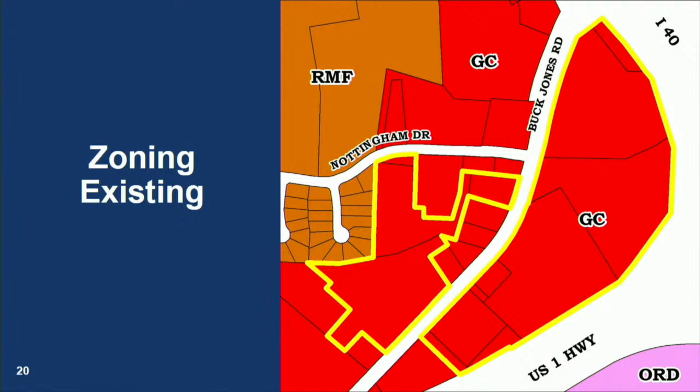As noted, the current zoning is general commercial, again with no conditions currently included on the site. The applicant is seeking the mixed-use district, or MXD, which allows the applicant to set their own dimensional standards and propose alternative standards to the land development ordinance.

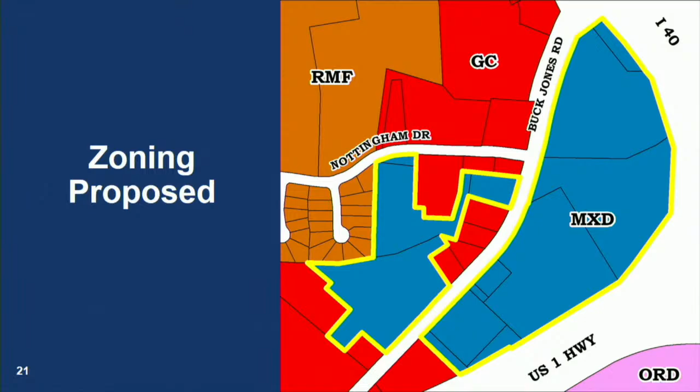Talking more about the MXD district, MXD also requires a preliminary development plan to be submitted. In this case, the South Hills development, due to the size and the assemblage, the applicant team is proposing a framework for redevelopment to occur.

At the heart of the framework is turning the existing surface parking shopping center into a network of streets forming a grid network, which could create up to 27 development blocks. Within the development, there will be 75% use of structured parking and 60,000 square feet of community gathering area distributed through the site.

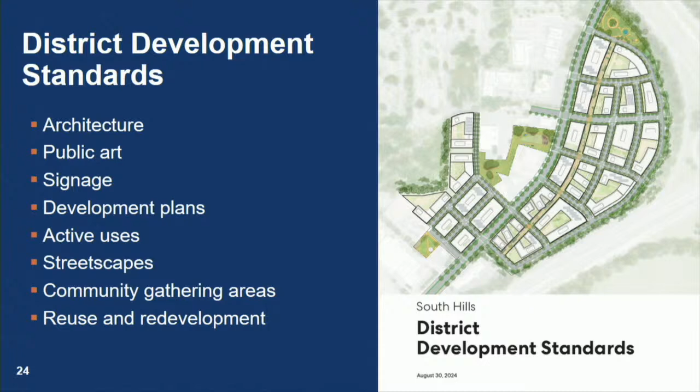To govern the framework, the development team has proposed a set of district development standards which propose site-specific standards for architecture, public art, signage, development plans, active uses and streetscapes, community gathering areas, and reuse and redevelopment.

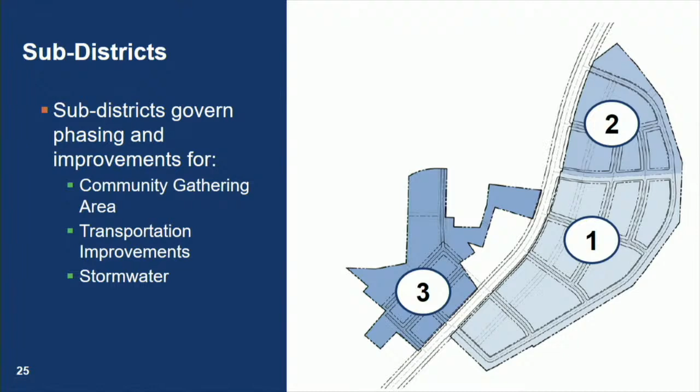The site has been divided into 3 sub-districts for the purposes of phasing and infrastructure improvements. The first 2 sub-districts are located on the east side of Buck Jones Road, with the third being located on the west side.

Unlike other developments that we typically see, the site is not governing the location of uses by pod or zone. Instead, it'll govern uses by a land use ratio and regulation of active ground floor uses. First, the land use ratio is proposed to require 25,000 square feet of non-residential area be maintained for every 100 multifamily units, and this ratio must be balanced throughout the site duration to control the mixing of uses on the site.

Secondly, the site would regulate active ground floor uses. They've divided the ground floor uses into 3 types: primary, secondary, and tertiary. Primary uses include uses that would be most active, so like retail, restaurant, uses that have a lot of public activity. The primary ground floor active uses would be located along this salmon-colored area that runs north and south through the site on the east side of Buck Jones Road.

Secondary uses would include lobbies, ground floor offices, things like that. Those uses would be allowed along other ground floor frontages. Lastly, there will be some allowance for tertiary active uses, which would allow for service areas, loadings, more back-of-house type operations typically.

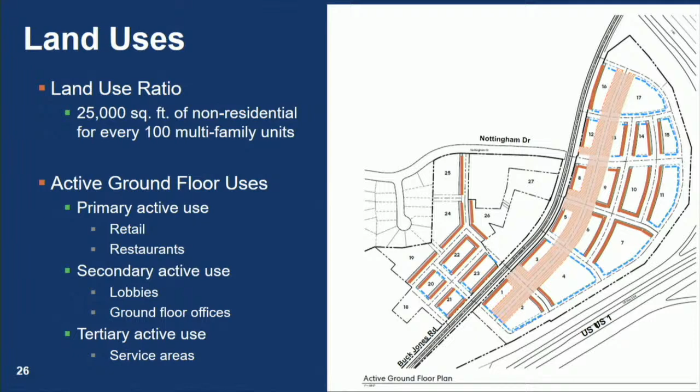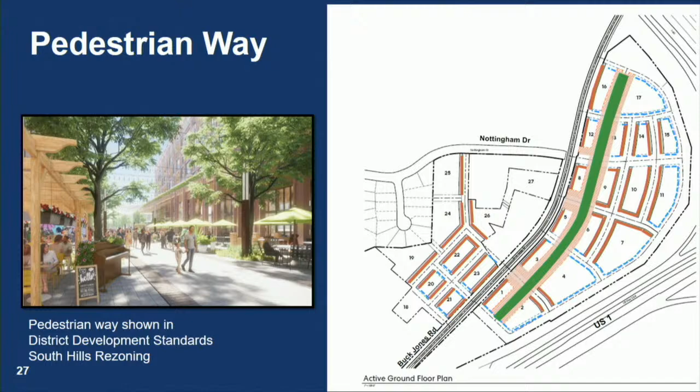Running north and south through the site and aligning with the active ground floor uses is a pedestrian way. This will be an area accommodated for pedestrians and bicyclists, and the most active uses will be fronting this pedestrian way, again running north and south through the site.

Building heights have been established within 3 height zones. Height Zone 1, the western part of the site adjacent to residential uses, will allow for buildings between 2 to 6 floors. Height Zone 2, which frames Buck Jones Road, will allow for an increase in height between 3 to 15 floors. Height Zone 3, closest to the highway along the eastern portion of the site, will allow for the tallest heights, ranging between 3 to 23 floors.

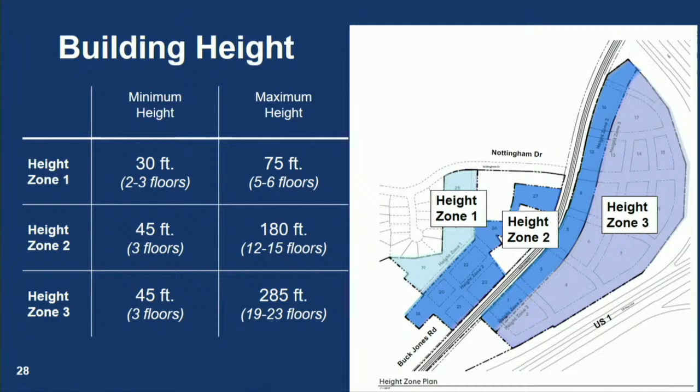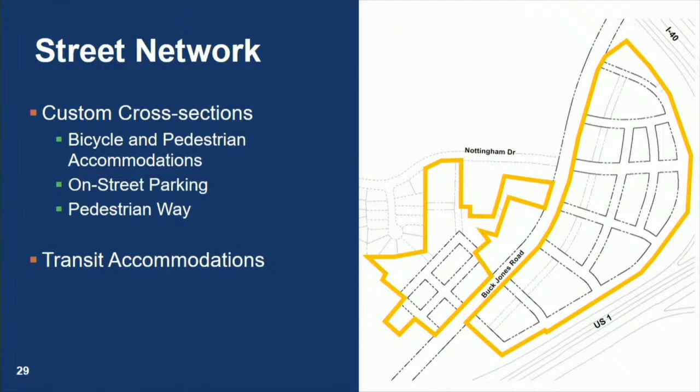The site is proposing custom cross-sections that will include accommodations for pedestrians and bicyclists. There will also be provisions for on-street parking. Again, the pedestrian way, which runs north and south through the site, will provide plenty of accommodations for pedestrians and bicyclists as well.

The applicant has also committed that a transit hub will be included within the site. The location of the hub has not yet been determined, but key characteristics could include additional amenities such as bicycle and scooter rental or storage, wayfinding signage, scheduling boards, and shaded or conditioned waiting areas. The amenities listed here are in the standards book and not necessarily committed to as conditions.

Due to the mixed-use nature of the site and access to transit, bicycle, and pedestrian accommodations, the applicants are proposing a reduced parking ratio for multifamily dwellings. The parking ratio would require 1 space per bedroom for 1 bedrooms or studios, and for each additional bedroom, an additional half space. This is slightly less than our LDO requirement for multifamily, but it is in alignment with some of the reduced multifamily parking found within Cary's town center.

There will also be no visitor parking required. The parking commitments also include a 75% parking commitment to use of structured parking decks, which is above and beyond Cary's requirements, as Cary does not require structured parking. They've also committed to EV charging at a ratio of 1 space per 200 spaces, and they're committing to running conduit at a rate of 10 per 200 spaces.

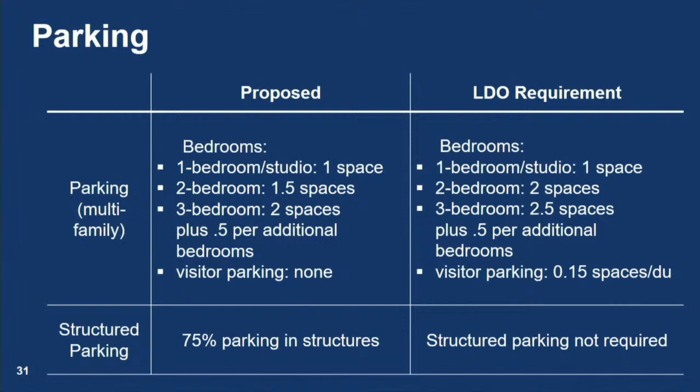To continue building on efficiencies of the mixed-use development, the applicants are also proposing specific allowances for shared parking. They're proposing that up to 70% of parking for a use could be accommodated through shared parking, an increase from Cary's requirement of 35%. Parking could not be shared across Buck Jones Road, and this will replace distance requirements from the LDO. For any shared parking, appropriate justifications would be required to be submitted during development plan review, including looking at the use and time of use for these particular uses to ensure sharing of parking does not occur across uses that need parking at the same times of day.

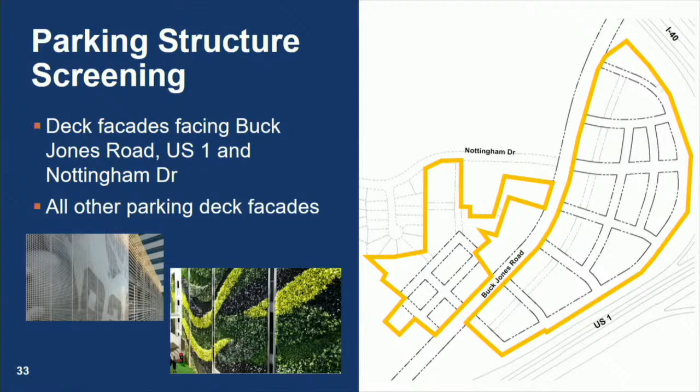South Hills is proposing to develop and implement transportation demand management. This is a type of project or program that will be the first in Cary to actively engage in this area. The goal of transportation demand management is to use a combination of services and built infrastructure designed to reduce the demand for single occupancy vehicular travel and to promote alternative modes of transportation such as walking, cycling, carpooling, telecommuting, and public transit.

Due to the nature of transportation demand management relying on services and programs, we anticipate that much of the program will be enforced through a forthcoming development agreement, but have requested that it be referenced as part of the rezoning since assumptions of the traffic study were made based on the use of a transportation demand management program in operation for the site.

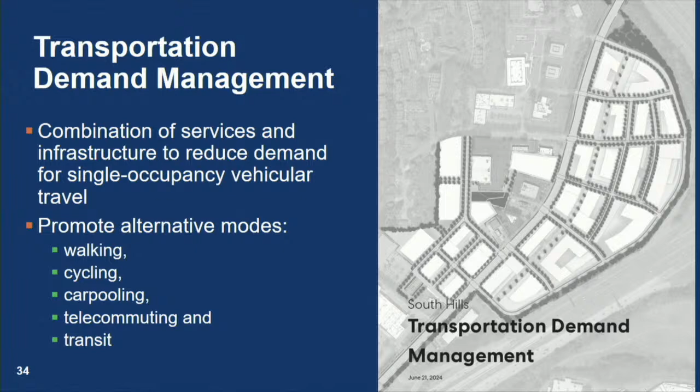As part of the development, a supplemental traffic analysis will be performed for each of the 3 subdistricts to assess the need for improvements associated with that subdistrict. The applicant team has developed a transportation improvements table as a sheet of the preliminary development plan, which preliminarily identifies some of the transportation improvements, and the analysis for each subdistrict will be performed prior to approval of any development plan that would occur within that particular subdistrict. This will allow us, staff, and the applicant to work together over time to ensure that adequate transportation infrastructure is accommodated.

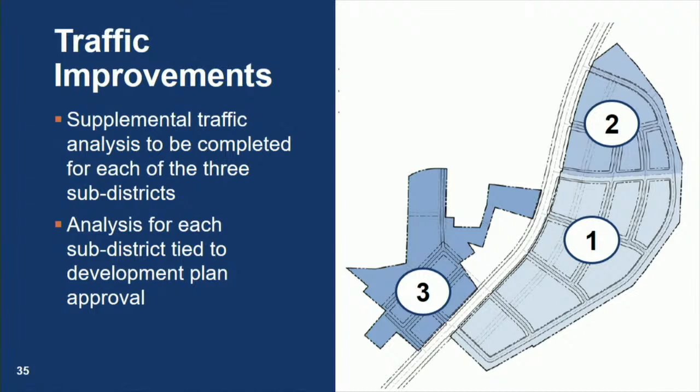Community gathering area will also be governed by subdistrict. The applicant has committed to an overall minimum requirement for community gathering area of 60,000 square feet, which is about 1.5 acres. This exceeds Cary's minimum requirement of 5,000 square feet. They're proposing that gathering area be established and regulated by subdistrict, and that 20,000 square feet of gathering area will be provided for each subdistrict. Within each subdistrict, there will be a major community gathering area that's at least 10,000 square feet.

The subdistricts will also regulate the timing and phasing for community gathering areas. Within that, the applicants are proposing for any gathering area that's 10,000 square feet or larger, that a portion of that will be permeable area.

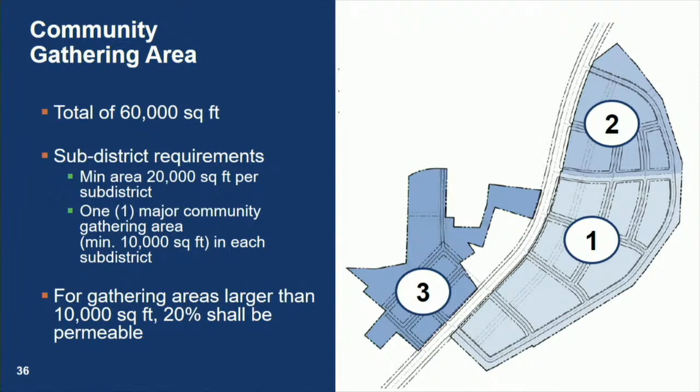While the site was developed before Cary's current stormwater requirements were in place and would likely not be required to add traditional stormwater devices typically seen in greenfield development, the applicant has proposed to include custom requirements, which would include a post-construction stormwater management plan with peak flow reduction at a specific point on Walnut Creek that was determined not to negatively impact flooding conditions downstream, and a commitment that each subdistrict of the plan achieve a targeted nitrogen reduction through the use of green stormwater infrastructure.

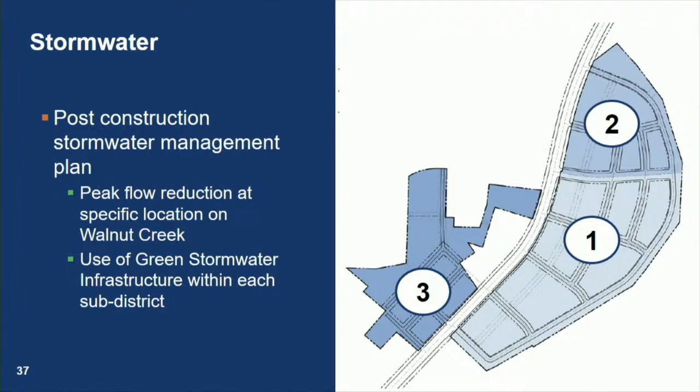As part of the district development standards, the applicants are proposing that the standards within this document will replace the requirements of Cary's Community Appearance Manual. The Community Appearance Manual regulates building materials, architecture, and design for buildings, so these standards will replace that document, and they are proposing alternative standards to address design and architecture.

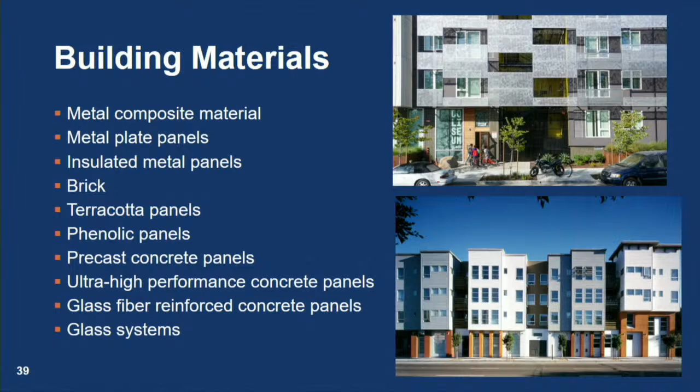Notably, the district development standards propose a material list that substantially varies from the standard masonry requirements of the Community Appearance Manual. Examples of alternative materials are listed here. This variation will allow buildings to have different appearances, perhaps unique to the South Hills district, and not necessarily consistent with other major projects in Cary.

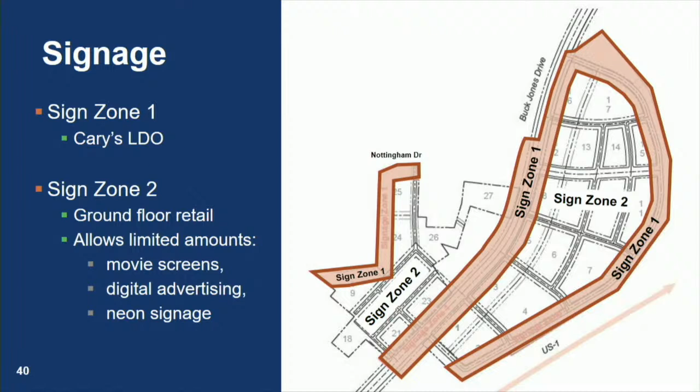The applicants are seeking most of their modifications within Sign Zone 2, which represents the interior portion of the site, not necessarily visible from exterior roads. Within that, they're proposing some variation for ground floor retail signs, as well as limited amounts of movie screens, digital advertising, and neon signage. Specifically, their standards propose 4 tiers of signs that will include requirements for entry monuments, ground level activated uses, wall signage, and vehicular-oriented and pedestrian-oriented directional signs.

Pedestrian entry monuments, which could also be obelisks, could include the project name, and would be located at entry points along greenways, pedestrian ways, and gathering areas.

Most flexibility will be permitted for ground level tenants within Sign Zone 2, the area interior to the site and not necessarily as visible from exterior roads. They're proposing allowances for painted signs, such as the example we see here, illuminated cabinet signs, and also allowances for digital parking deck signage.

The reuse and redevelopment provision allows for the reuse of existing buildings within subdistricts 2 and 3 to remain as long as certain criteria are met, such as no increase in the overall square footage. It also permits temporary pop-up structures, and there are no limitations on the duration of the reuse.

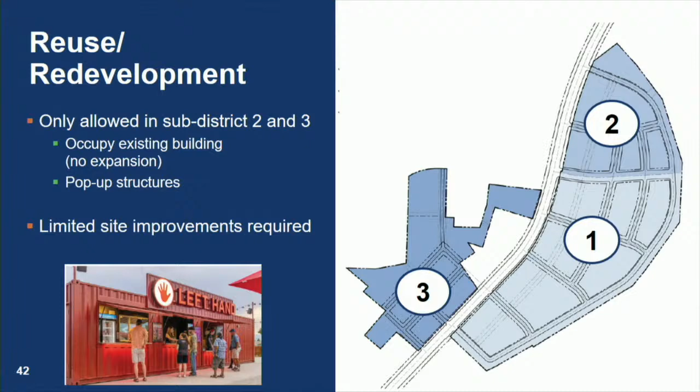The applicant has proposed customized streetscapes. This will include streetscape width variation, and plantings will include native trees, and other features such as seating, trash receptacles, and bike racks. This differs from Cary's streetscape requirements, which are generally mostly planting areas, but perhaps this proposal is more appropriate for an urban mixed-use development design.

There are also limited champion trees on the site, and the applicant proposes removal of the trees. They have proposed, however, to delay removal of the trees on the west side until a development plan has been submitted. The PDP will also reduce the highway corridor buffer width, which could range now between 50 to 100 feet, to 30 feet. In addition, the applicant is also voluntarily offering a buffer, not required by the LDO, adjacent to residential uses to the west.

The LDO recognizes that for mixed-use projects such as this, flexibility is needed from Cary's land development ordinance. It provides that in order to seek compliance with Cary's community plan and achieve alternative design standards. So I'm going to run through some of the alternative design standards that they're proposing.

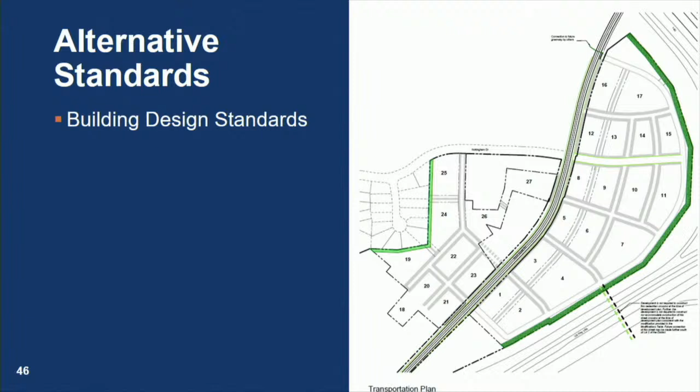Continuing on, they are proposing alternative design standards for buildings, which is when I talked about the changes to the Cary Community Appearance Manual. They're also proposing a change to traffic study requirements so that no quasi-judicial approval would be required if development happens within 15 years of rezoning approval. Our ordinance requires a 2-year limitation, and they're anticipating that the build-out of a site of this size could take more years than that, so they're increasing that to 15 years.

We also have on our adopted roadway plan a proposed road to eventually go from the site over US 1. The ultimate location of the road has not yet been determined, and accommodation for a road such as this going over a highway could be fairly impactful to the site. So they are requesting a modification to accommodate right-of-way for this road going over US 1. And then of course they are also proposing alternative standards for signage, which I just walked through.

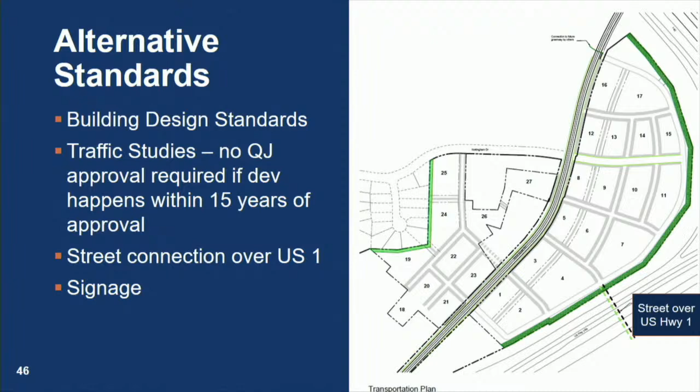So this concludes the overview of the rezoning request. Now I'm going to talk a little bit about our analysis with the Cary Community Plan. Then after that, I'll wrap it up and turn it over to the applicant to give their justification.

Based on our review, we found that the case furthers policies within the live, work, shape, engage, and move chapters. I'll talk through some of those. Overall, the proposed development will allow for a vertically integrated mixed-use project arranged in a small and connected block network with ample pedestrian and bicycle accommodations.

The mix of uses and the density are generally consistent with the destination center. The project proposes appropriate transitions through building height variation, proposing the tallest buildings to be adjacent to the highway, and reducing the height adjacent to existing residential uses to the west. They are also proposing the use of natural buffers adjacent to the residential uses to the west, and then a natural buffer also adjacent to the highway to the east.

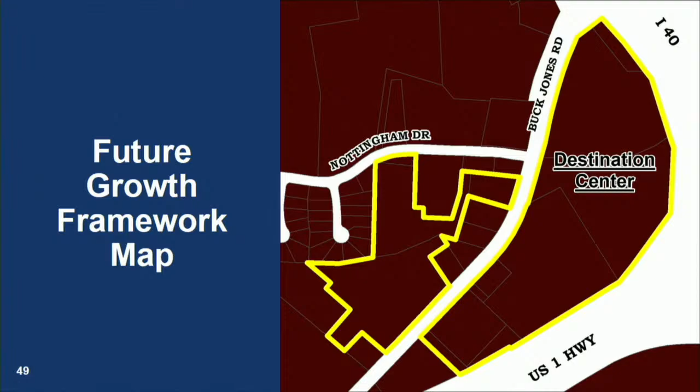When we look at the live chapter, we note that their proposal will increase housing options within a destination center in alignment with policy 2 of the live chapter. Addressing policy 3, they're also emphasizing placing higher density housing near transit stops, shopping areas, services, and office buildings within a destination center, so this meets that policy guidance. Additionally, the policy contributes to addressing policy 6 by incorporating workforce housing for 5% of renters with incomes not exceeding 80% of the area median income, and this commitment is valid for 30 years.

The proposal responds to policies found within the work chapter by providing diverse workplace locations in an environment that caters to the needs of modern businesses and workers. The inclusion of taller buildings along the highway serves as a gateway into Cary, enhancing the visual appeal and prominence of the destination center. This aligns with Policy 2's objectives of creating attractive and competitive locations for businesses and workers, as well as Policy 10's emphasis on mixed-use, walkable environments.

Incorporating research and development uses within the destination center also further enhances its appeal to businesses seeking innovative and collaborative work environments. The proposal also directly addresses SHOP chapter guidance through the redevelopment and revitalization of an aging shopping center, aligning with the preference for revitalizing older centers into more vibrant destinations rather than developing new commercial centers.

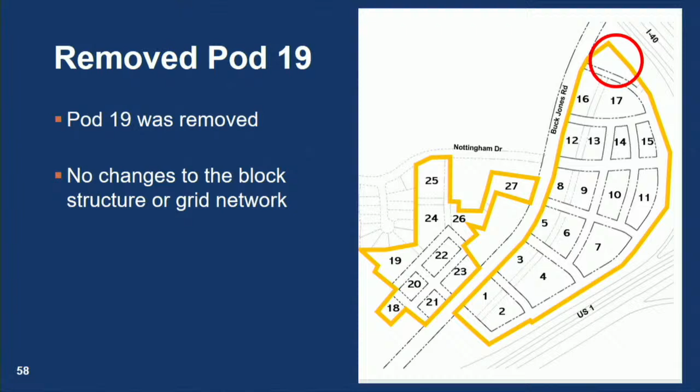They did remove a development pod, but this doesn't necessarily change the layout and the shape of what they're proposing. The area highlighted in red at the very top was identified previously as a developable pod. That's since been removed, so the number of pods has been reduced by one, but the overall layout has not actually changed.

They've changed the approach to EV charging to a ratio rather than per deck. Previously, they were proposing spaces to be constructed per parking deck; now it's per number of parking spaces. They've committed to a transit hub and additional details associated with that, and provided more specificity on their stormwater commitment, specifically to be site-specific in this case. They've adjusted their parking rate for multifamily dwellings and further refined their shared parking provisions, and changed their approach to early activation to more of a reuse and redevelopment approach tied to certain sub-districts.

With that, staff's preliminary finding is that the rezoning is consistent with the Cary Community Plan. We find that the proposal supports policies found in the Live, Work, Shop, Shape, Engage, Move, and Serve chapters. We also note that the proposed rezoning supports the redevelopment of an aging shopping center within a destination center, which furthers policies from both the Shape chapter as well as Shop and Work.

So with that, I'm going to now turn it over to the applicant, Jason Barron from Morningstar Law Group, to give a justification for the request, and following that I'll be available for questions. Thank you.

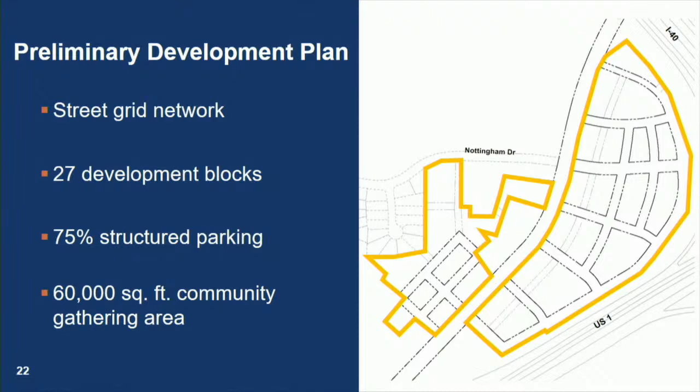Let me pull up a slide showing the network. So the planning for the center currently would accommodate these blocks located here, just south of the Nottingham Drive extension. As Jason was pointing out earlier, there's the pedestrian way that runs north-south through the site. The planning for the center would have it fronting on that pedestrian way, taking advantage of the activity from pedestrians and bicyclists, with retail located just to the north and south. Of course, the center is placed on the 2024 bond referendum, so we'll know the outcome of that in November.

This development proposal can work with or without the center. As you can see, they're currently showing that if the center doesn't go here, you could develop up to 3 blocks essentially in the area. If the center were to be approved by the bond and we were to move forward with it, there's an allowance to merge some of the blocks for civic use such as the center.

Is that a condition or part of the PDP? If the center is approved, it will go there. Is that the condition? The location is not specifically set, but within the PDP they do have an allowance to merge some of the blocks for civic uses. So if the center were to move forward, they would be able to merge some of the blocks, but we've not identified specifically where the center would be located.

So there's nothing, so the developer could, if the bond goes through, decide not to allow this center to go there? There's nothing in writing that specifies the location? Yeah, not with the rezoning per se.

Okay, there's probably going to be a forthcoming development agreement that would tie down some of those elements that would be outside of what you'd see in a rezoning approval. The development agreement would probably cover the land for the center—the exact acreage, where it would go, the purchase of the land, also infrastructure improvements, things like that. But that would be separate from the zoning.

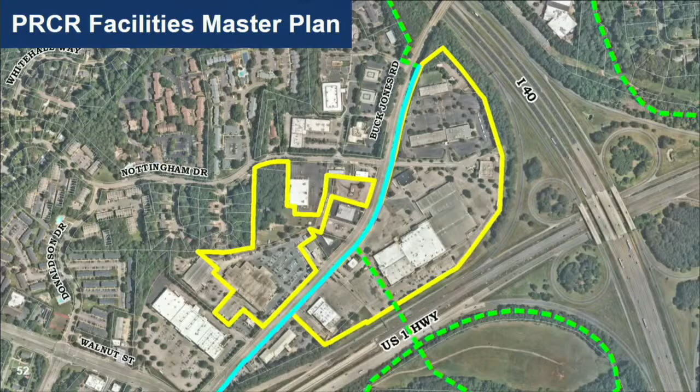A key point is that's obviously not a condition, but it's also not something that's expected of the developer. It's a much larger effort that would be more collaborative in scope. It would be nice to have, but it's not germane or committed as a result of whatever rezoning happens here. We would be looking for accommodation of the landing pad during development plan review, but the actual construction would be outside of the scope of this project.

One quick question to piggyback on that - I thought in an earlier slide it was called a street connection, now I'm hearing greenway. Is it just pedestrian? There is that too, but there's also a street connection shown on our adopted roadway widths map, for the same location.

And the applicants are proposing a modification to not have to accommodate that. A street connection would be much more impactful to the site, so that's an area where they are requesting a modification. So they're wanting to remove that and make it pedestrian only? Yes.

So going off that, one quick question - I was thinking Buck Jones Road, I love the scale of this, very pedestrian friendly, it's great. But crossing Buck Jones, since we're connecting the two sides, there's a lot of residential on Nottingham Drive. What are some of the things you guys are potentially considering to make the pedestrian crossing safer?